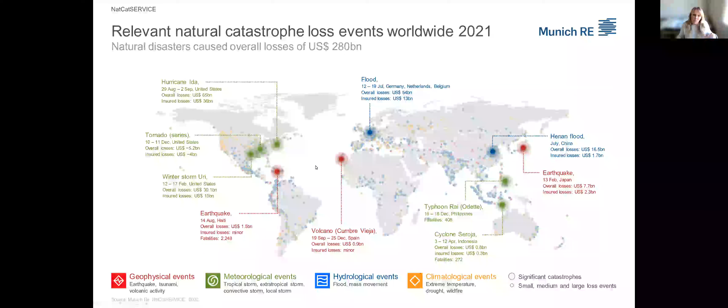So when we look at those top 7 costliest natural disasters worldwide in 2021, we see that this European flooding really ranked second out of everything else in the world. First was Hurricane Ida, with $65 billion of total damage and losses. The flooding in Europe, the sum of all 3 countries combined, is about 54 billion of damage, 13 of which were insured damage. The US in total actually took away the highest disaster losses, with a cumulative sum of $145 billion.

Now when we look at purely European ground and look at the flood events in the last 30 plus years, we see that the 2021 flood was also really the heaviest in terms of the death tolls. 238 is more than 3 times whatever a flood event has cost in the last 3 decades.

And the same is reflected in the cost amount. We see here with the $54 billion that I just mentioned, the 2021 flood way surpassed any of the floods since the early 90s. Now the question may arise, why is this so expensive? Why was this so costly?

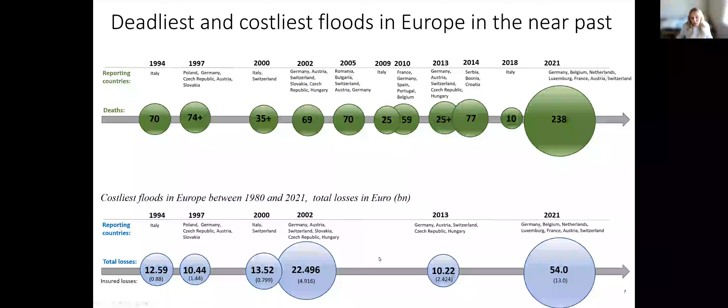Now, many people asked afterwards, why was this flood so devastating? Especially in areas like the Ahr Valley or other regions along the Erft and Ahr rivers, it was really a combination of very unfortunate but common circumstances: the local geological condition, a pre-flood soil saturation, and an extreme precipitation.

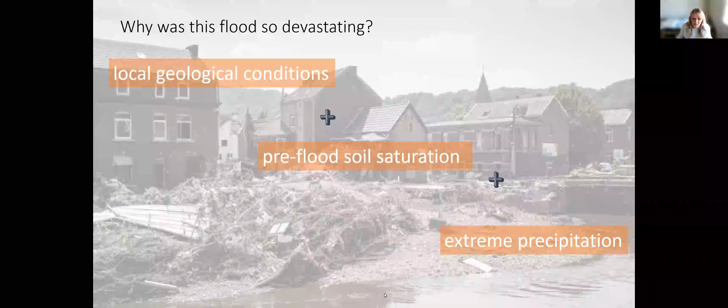So when we look, for instance, at the Erft River shown on the top photo - I hope you can see my mouse pointing out the river - as well as the River Ahr, both are located in valley areas. If we look at the elevation profile for these cross sections outlined on the left, we see that the rivers respectively lay at the lowest elevations and are surrounded by hills, mountains, occasionally with slopes of up to 55% inclination.

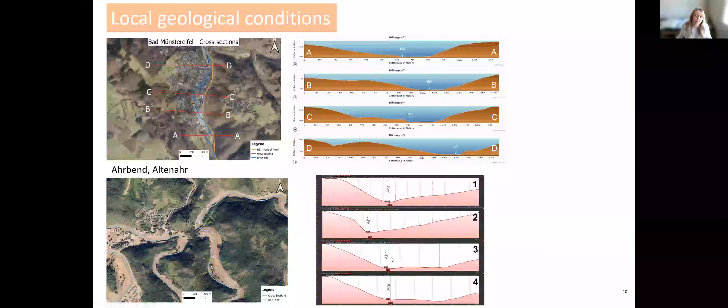So they don't only have the precipitation of the area, but also the runoff of all the surrounding area and whatever comes from upstream. So the accumulation of water and likewise damage that was caused in these valleys was enormous.

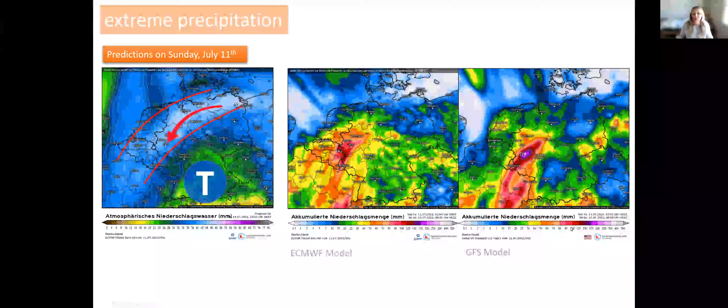Now, the warnings went out early. We knew that the low pressure system Bernd was coming in from the south of Europe into Central Europe, especially Germany. Initial predictions set a cumulative precipitation of about 100 to 150 millimeters occasionally, or very specifically up to 200. Now, as the days Sunday, Monday, Tuesday progressed, on Tuesday, this whole map took a little bit of a different shape. Now really the country was alarmed, huge amounts of precipitation expected.

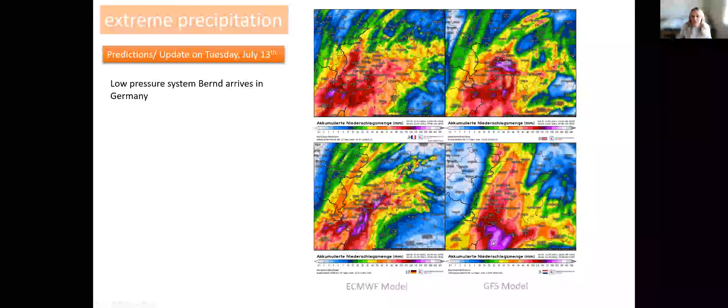This number was actually exceeded in some regions - it went up to 240 or 248, even in Belgium.

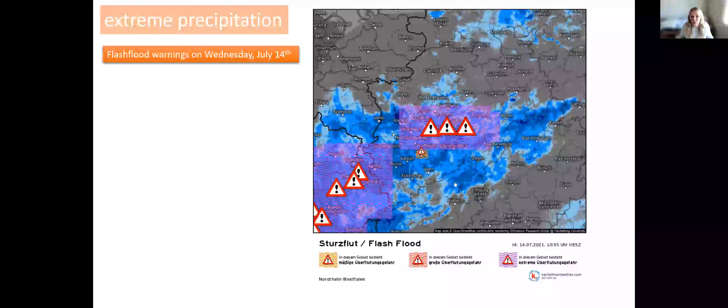And now on Wednesday morning, really the first flash flood warning was issued. You can see the blue area expand in size and width, and flash flood warnings for a majority of the regions in Germany, Luxembourg, and Belgium was issued. Still, not all people evacuated.

Many people thought it was going to be a similar situation to the 2016 flood event, but on Thursday morning, this little river here, the Ahr River in Altenahr, took a totally different turn and turned into a massive river stream, flooding all the plains around it. The flow velocities were relatively high, much higher than experienced before, and I believe Dr. George is going to comment on that later in this region.

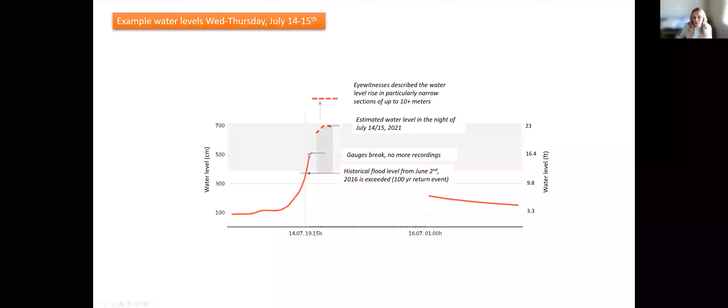As a result, most flood gauges actually lost their capability to read. It started a little below 100 centimeters, 1 meter, and the 3.45 meter mark from 2016 was quickly exceeded. The gauges broke at about 5 meters, and the final water level height was estimated to be around 7 or 8 meters, in some regions up to 10.

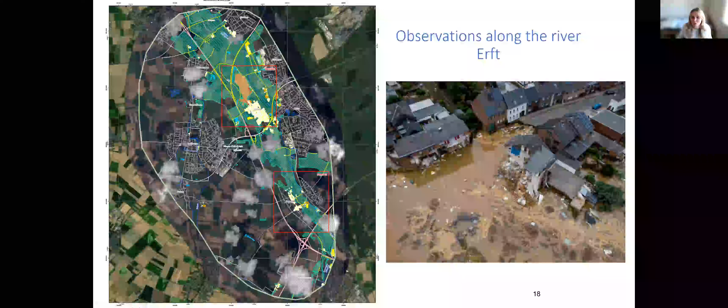Now this left failure right here was heavily featured in the news, and you might have seen this. What still appears as just a limited amount of damage in this photo, with damage to residential structures and this road being completely flooded away, looked substantially different from an aerial perspective. You see here this gravel mine in the very back.

As a result of this gravel mine, the strong hydraulic conductivity of the gravelly soils here, and the soft surface soils in the nearby agricultural fields, the water had an easy way in to fill that gravel mine as a very low-lying area. It formed these massive canyons that you see on the left-hand side of the photo. At this time, these buildings were still standing, shortly after partially ripped away, and they were not there anymore when we were there.

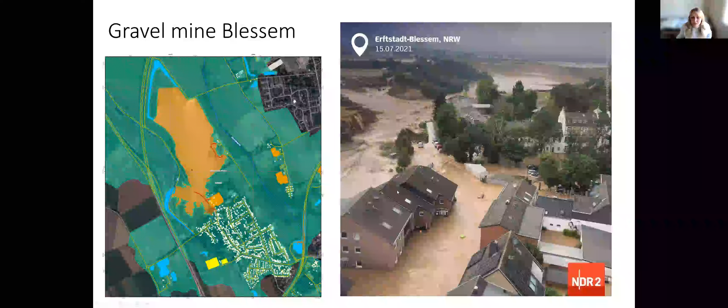Here we see a before-after photo, and it really looks like another version of the Grand Canyon. Those cuts were up to 10 meters deep. So nearby, we had this building you can use as a reference for both pictures.

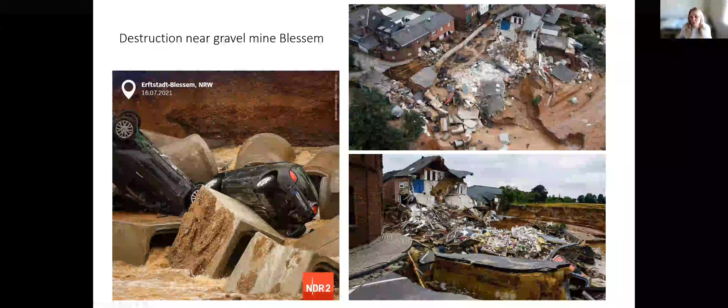As a result, residential structures and infrastructure were damaged heavily. We can see on the left side, and also here on the top photo, the damaged pipelines. A freshwater supply line made of concrete segments was completely damaged, along with a massive amount of residential structures. Everything, all the debris, was washed away with it.

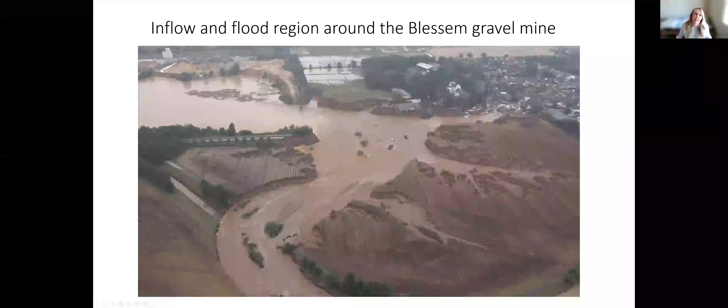This aerial perspective again nicely shows these craters that formed over a vast extent of this floodplain. When we arrived on site, it took a slightly different shape. The water had receded, and work was underway to clean up the site.

You can still see here some minor slope instability along the river, along the gravel mine, and we were able to access the gravel mine with police support, even though it was restricted at the time.

In total, 130 kilometers of roads were closed and damaged right after. 50 kilometers were still closed and not usable two months later, and the initial repair cost estimate of 100 million was by far exceeded.

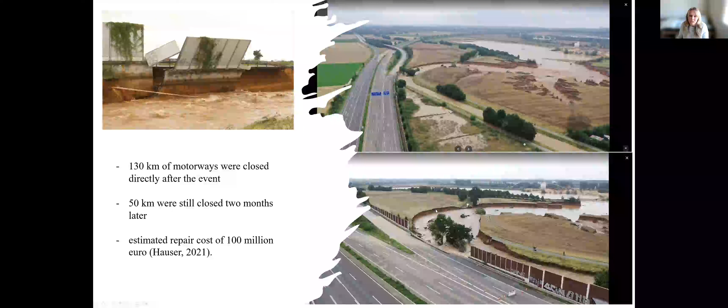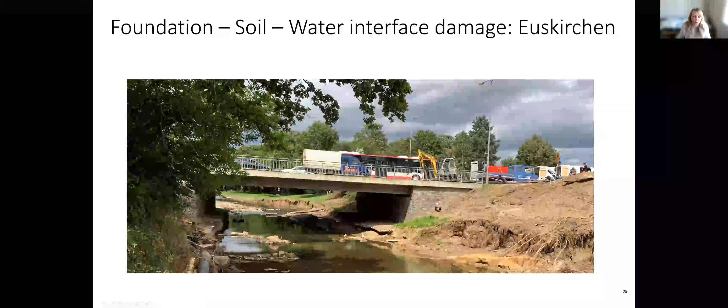Along this river Erft, we had some other observations worth mentioning because they were common and repetitive as a failure pattern. We very frequently saw erosion and washout of the area between soil, foundation, and water interface. Even though this armoring was supposed to be more engineered and stabilized with stones and cement, we often saw it washed out, in severe cases causing substantial damage to the bridge foundation itself. You see this here, with washout magnitudes of close to up to 1 meter.

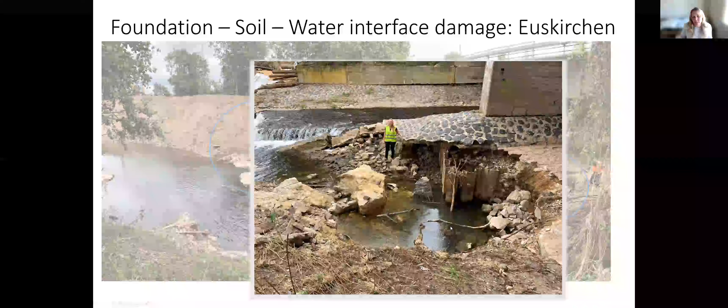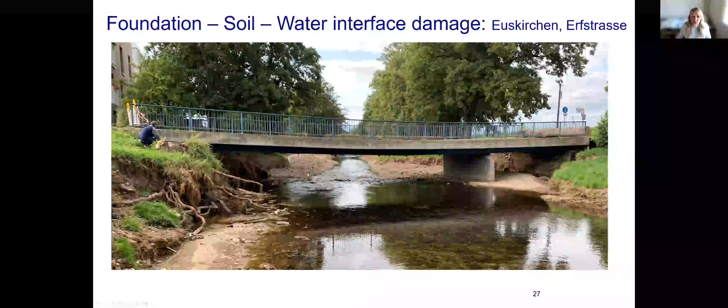Another example along the Erft River is this bridge, which we also looked at. A very common failure pattern is washout of the abutment right here. Even though this abutment is still standing, you already see the bridge deflecting heavily. Something on the right-hand side looks a little odd, and after checking Google before-imagery, we noticed that this abutment, while it was standing, was taken out by the floodwaters. As a result, the pier wall on the left-hand side shifted off its original location by at least 40 centimeters and experienced substantial tilt.

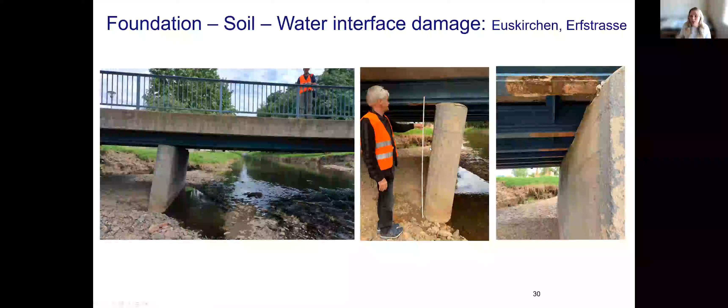The Erft River also expanded substantially in width in areas outside the residential regions of the city. This is approximately 3 to 4 times wider than it used to be. You see these deep cuts here, and infrastructure lines were heavily damaged. Worth mentioning, the minimum embedment depth for utilities in Germany is approximately 60 centimeters, for areas that don't experience frost, going lower in colder regions. But we noticed this might not even be enough, and this is something that could be reconsidered for future utility design and relocations, moving away from riverbeds or channels and considering a much lower embedment depth.

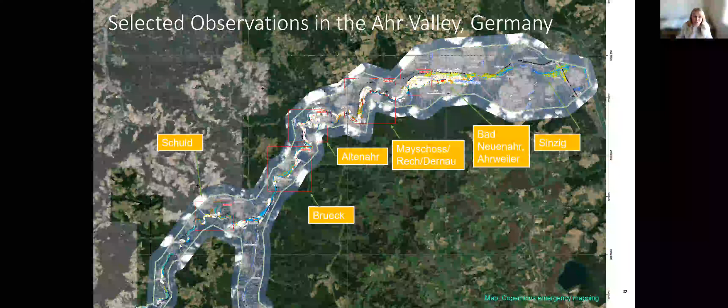From here, I want to stop with the Erft River and give a 5-minute damage overview of what we saw in the Ahr Valley itself. This was the heaviest region with damage. We visited almost every single little town and stopped at every location where there was something notable, but this was really the one that was most shocking, and you might have seen this in the news as well.

Over 200 hectares were affected, approximately 500 acres. Out of the 56,000 people in the Ahr Valley, 17,000 could not return to their residences. Out of the 4,200 residences or buildings, 467 were destroyed and 3,000 were damaged to the point where you could not return. Some only lost the facade, some lost the complete house with only the basement standing. That accumulates to 70% of the 4,200 buildings having to be removed.

Out of the 112 bridges, 62 were completely destroyed and could not be used, 13 were severely damaged and had to be demolished afterwards, and 35 were operable after some repairs. Some of those you're going to see in the next slides.

This is the entrance to the Ahr Valley as we came in when we were driving in. Even though the Ahr Valley was closed to the public due to heavy disaster tourism, we did get the necessary permits to do our research studies there.

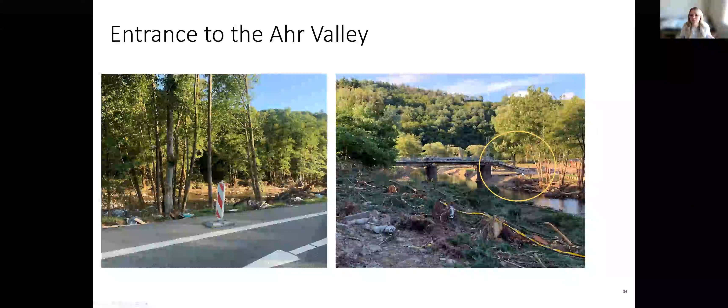This is really not a lot of damage that you see here. Minor, the abutment region failed and the bridge deck collapsed down. Compared to what we saw later, not a big deal.

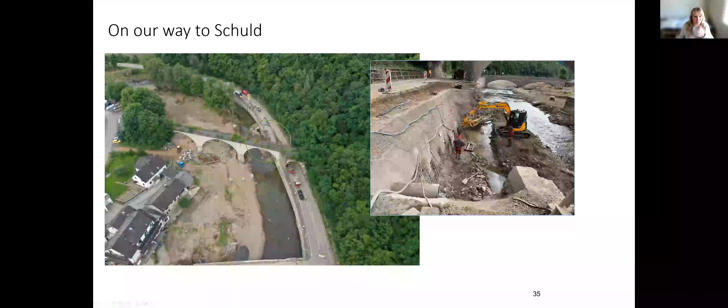Coming into Schuld, the damage was much, much more severe. You can see the river widening substantially, causing damage to residential homes all around it, a lot of debris that flew down, and also a lot of damage to the utilities. Here you see a temporary stabilization of electricity boxes that were exposed, but the town of Schuld did not have electricity, gas, or fresh water for several weeks after the flood.

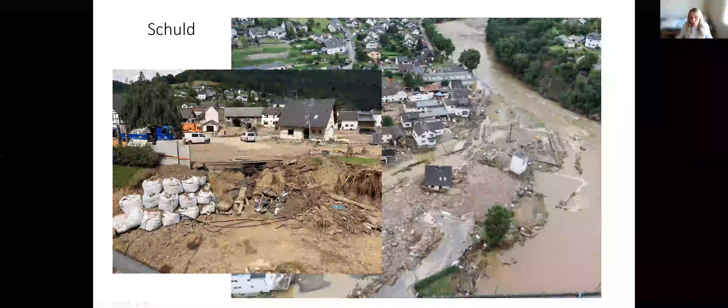Here you see a bridge in Schuld that is very representative of damage we have also seen further downstream. Even where some parts of the bridges survived, the top deck was often washed off, and a lot of damage was caused either by debris or by tree logs carried by the floodwaters.

One thing that all of us observed and really wanted to point out is the impact that debris and tree log loading had on the bridge, not just in terms of structural impact, but also in terms of clogging the cross-sectional flow area underneath the bridge, creating a dam, holding the water back, and then the water would rise, and either the bridge would fail or it would overtop at a certain point.

Eyewitness reports said they experienced tsunami-like flood waves coming downstream as a mix of water, debris, and trees. This bridge was later somewhat reestablished as a pedestrian bridge and reused. You can also see how the water masses eroded and washed off all the armoring surface soil and vegetation around, and water levels rose here up to probably the top of the first story of those houses.

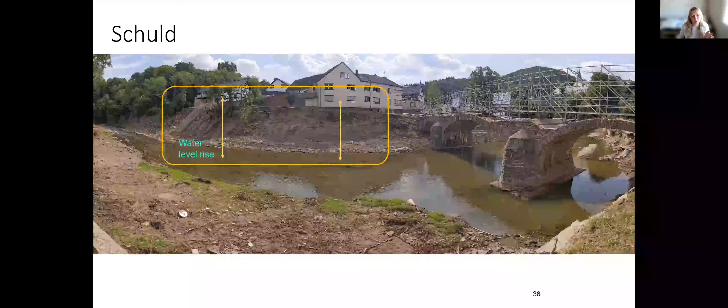The town of Altenahr itself was also heavily damaged, and one of these bridges was also one of the railroad tracks that used to continue here. Almost the entire set of railroad tracks or railroad infrastructure in the Ahr Valley was gone. About 600 kilometers of tracks total destroyed in Germany, more than 1.3 billion euros in damage.

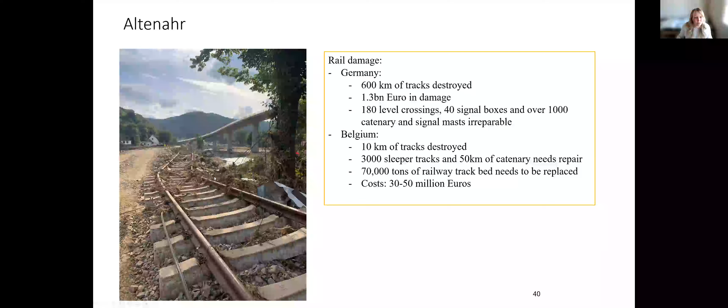Much less railroad damage was experienced in Belgium, but we saw this over and over again. When we came to bridges that were damaged, the rail tracks were still hanging, as here in Mayschoss. Here we see the same thing in Walporzheim. Here we see it towards Bad Neuenahr-Ahrweiler.

The Ahr Valley train looks so romantic when everything is intact, and this is the situation afterwards. This photo also gives us a good idea of these very common abutment failures and the washout of the abutment fill and the connection between the bridge end and the continuing natural ground or the roads. This was often observed by us as a very weak point that requires improvement in future construction.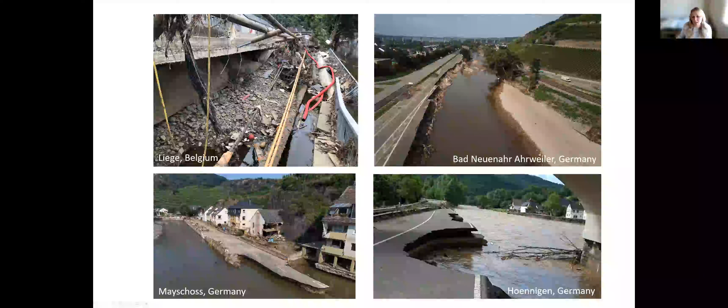One in Belgium, this is in Bad Neuenahr-Ahrweiler. This is still not repaired today. Here in Mayschoss, the erosion of the road, and this town was completely separated from everyone else, and in Hönningen.

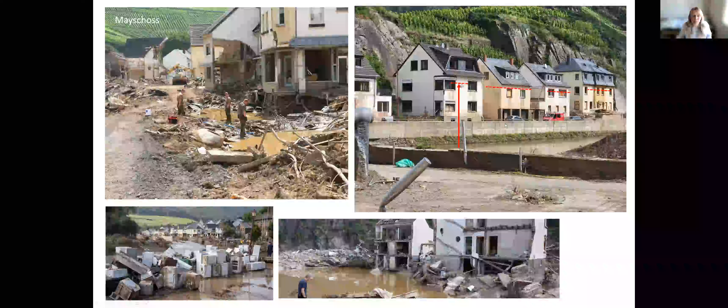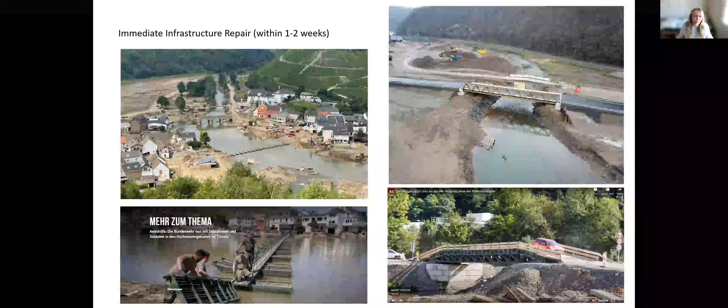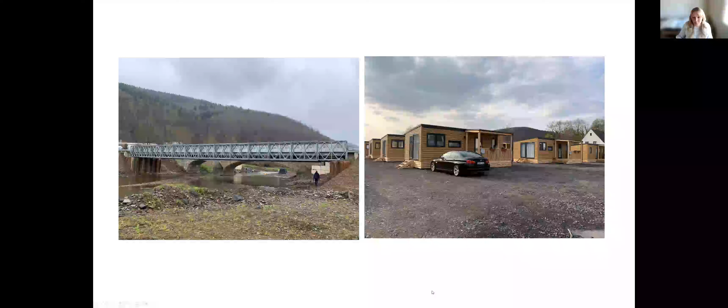So from here on, I will give it to Dr. Michael George, and he is going to present two case studies, the first one being on the famous Steinbachtalsperre.

Thank you, Professor Lemnitzer. Appreciate that. So I'm going to talk about two specific sites we visited.

The Steinbach Dam here in Germany was one of those. Most dams performed pretty well, with this case being the exception to experience some damage. This is a rock-filled type dam, built about 23 meters high in the 1930s and later updated in the 1990s. It has a pretty small reservoir, but has an asphalt upstream face and an asphalt roadway on top, which played a big role here.

During the event, this dam overtopped for about 3 hours, which resulted in some pretty severe erosion and gullying on the downstream side, creating concerns for potential failure. Typically rock-filled dams don't do well in overtopping events, often failing within 15 minutes to a couple hours. This dam held on, and a lot of that was due to the roadway.

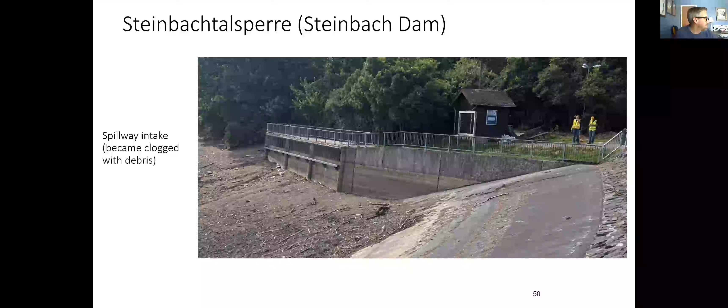It wasn't a bulletproof design. You could see in the last slide pieces of that roadway falling in. So would it have held forever? Probably not, but it was enough in this case to hold off.

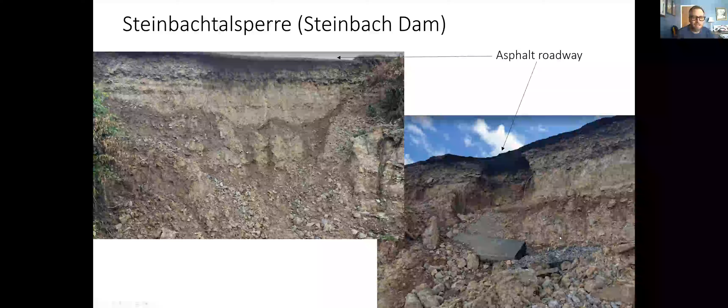Here you can see just a little bit of the materials. It was a pretty clay type rockfill material. We didn't really see much zoning even with the cut within the dam, which we'll see in a bit. But you can notice in the gullies that formed downstream these steps, which is characteristic of a scour progression in more cohesive materials.

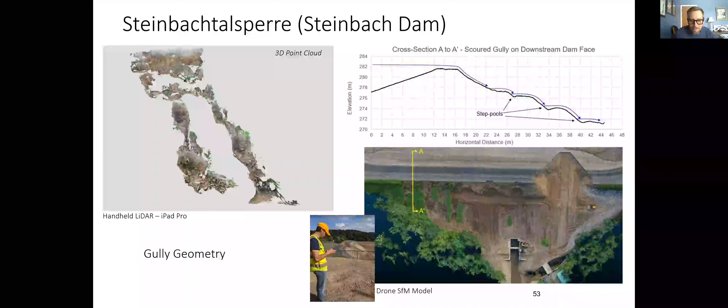Another component that contributed to the dam surviving was that the crest was relatively flat. You can see the excavation they cut in after to drain the reservoir, but the flatness of the crest prevented any major flow concentrations, so the rills and gullies that formed were relatively evenly distributed along the face, rather than one big location where flow was concentrated, which helped it as well.

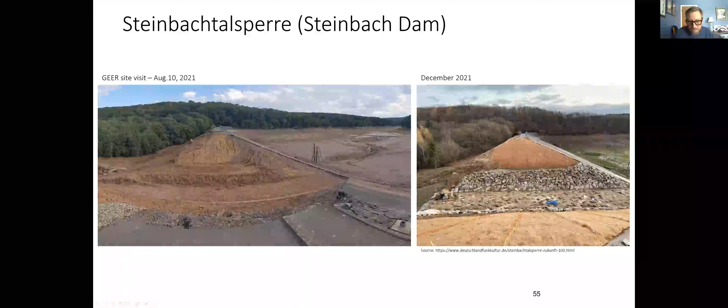The next site I want to talk about is Altenahr, and specifically the Altenahr tunnel. Anne mentioned this briefly, but it's a closed-in valley with very high water levels, and this was one of the areas that received a lot of damage.

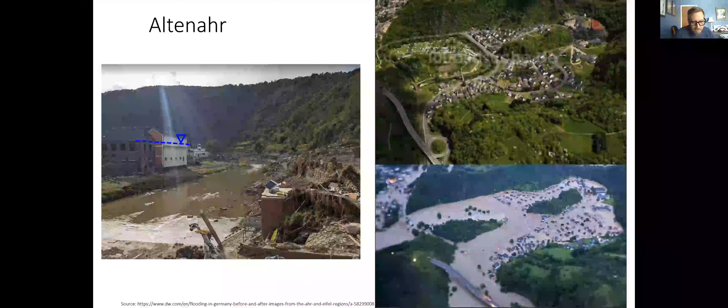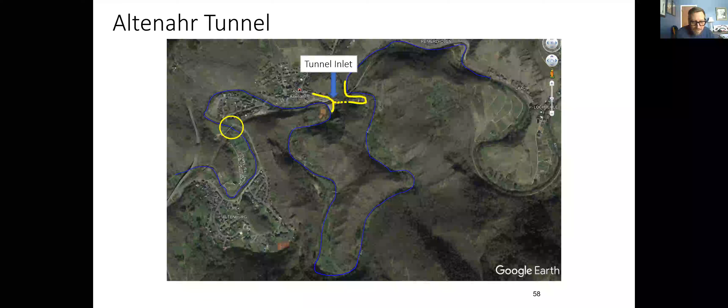You can see the inlet to the tunnel further down the valley there with the blue arrow. Here's where that inlet is, you can see the blue path of the river makes a big meander around it, and the tunnel connects two of those locations on the river. The yellow circle there corresponds to the picture from the previous slide.

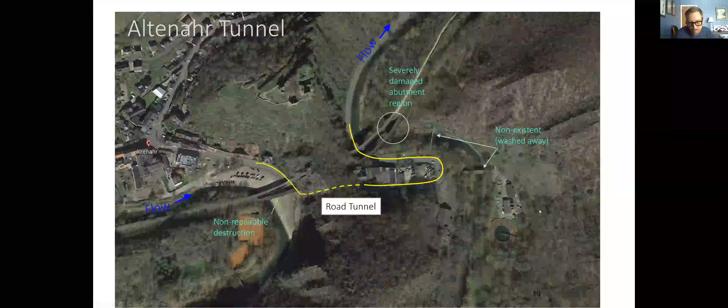Here's a close-up view from Google Earth. You can see two bridges coming in, and on the other side, two bridges going out. You can see a group of homes and buildings right directly downstream at the outlet of the tunnel, and there's a wastewater treatment plant on the lower right. Basically all that infrastructure was damaged, destroyed, or washed away.

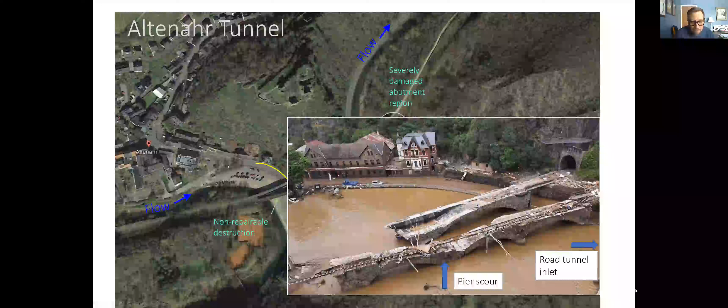Here's after the events. You can see the damage to the two railroad bridges. The pier on one bridge in the foreground is sunken down from scour. Also note the building in the upper left corner - you can see the water line in that, which will be shown in the next picture.

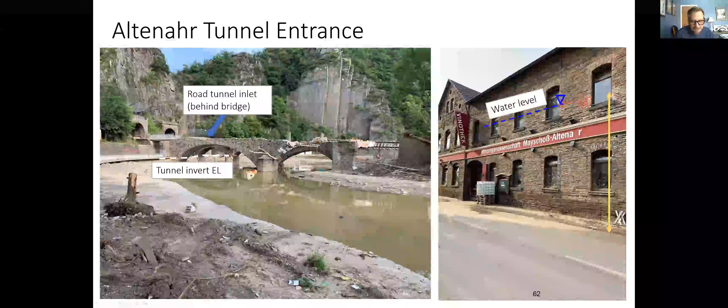Here's the entrance to that tunnel. You can see some debris marks along the lining of the tunnel. We also saw some plucking of the concrete blocks in the pedestrian path through the tunnel - those were covering some of the utilities that went through the tunnel. I think because they had gaps underneath, that allowed pressures to get underneath those slabs and essentially pluck them out and mobilize them downstream.

The flow in the event went through the tunnel, and that wasn't actually the first occurrence for this particular case. Prior to the 2021 events, this tunnel flowed through in 2016 with a depth of about 30 centimeters. But the depth in 2021 was a lot higher, or at least what we thought was the water depth, about 3.4 to 3.8 meters. The discharge associated with this event was estimated to be similar to the 1910 event, where the water level in the tunnel was about the height of my head. It really wasn't clear what the discrepancy in the potential water levels was, but based on what we saw, this appeared to be much higher in this event.

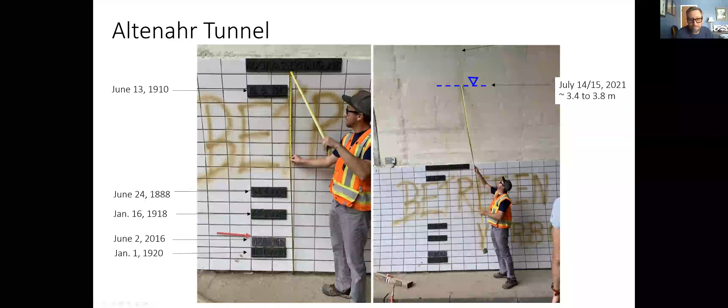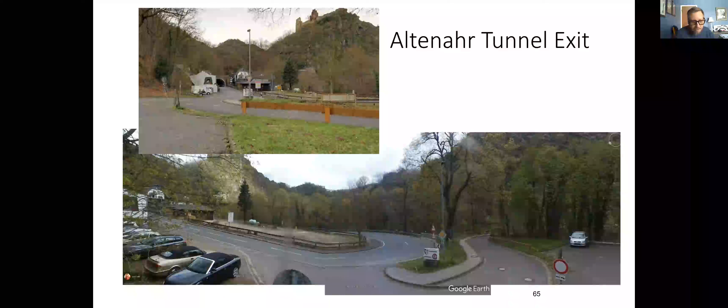Here's a couple of pictures from the 2016 event. On the left is the inlet to the tunnel, and on the right is the two railway bridges.

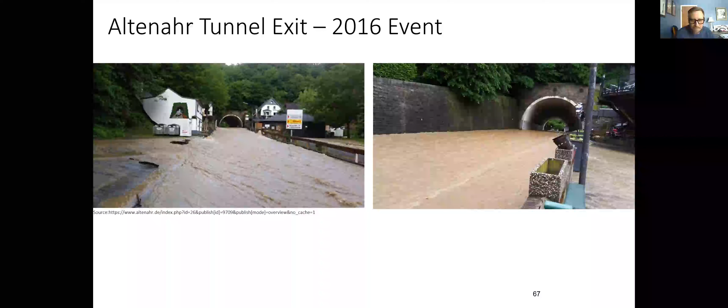Here's the outlets. You can see water essentially just cascading down the roadway there, and it wasn't a significant amount of damage in 2016.

The 2021 event was quite a different story. You can see the massive scour that occurred right at this outlet, the exposed bedrock, and the steeply dipping bedding planes or foliation, and all the undermining of the houses on the right. It's not surprising if you consider a 3 to 4 meter thick hydraulic jet coming out of the tunnel and impinging down on the material below, that we get such significant erosion.

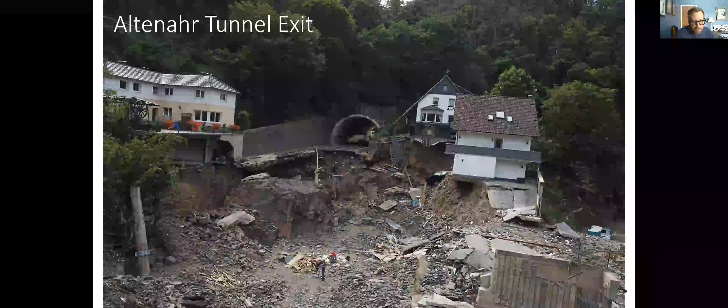Here's a quick slide on the bedrock I mentioned. Those outcrops held up pretty well - we did notice some plucking of some blocks. There looked to be more favorable jointing orientations, which helped resist some of the erosion. It did look like there was a shear zone or weaker zone running down the middle between those two bedrock outcrops, where we saw more scour and, coincidentally, undermining of the white retaining wall on the side. But basically those hardened areas of bedrock forced flow to the right of the photo towards these more alluvial type soils, which eroded quite readily, hence all the undermining on that side.

Here's another view just downstream. You can see the two bridges for the railways coming out there. On the right abutment, they had quite severe scour. The wastewater treatment plant at the top of the screen was essentially destroyed during the event.

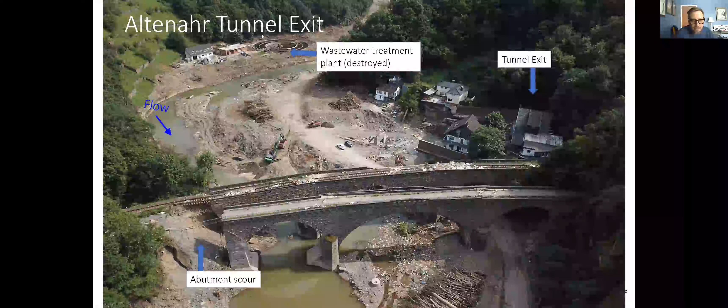This is a case where we used both drone and ground-based LIDAR. We only really had about 30 minutes to get into this site, so having those two methods to collect data was quite helpful. I took about 5 manual strike and dip measurements on the outcrop, but with the LIDAR data we can go back and take hundreds in the office. That was a real advantage having that equipment with us.

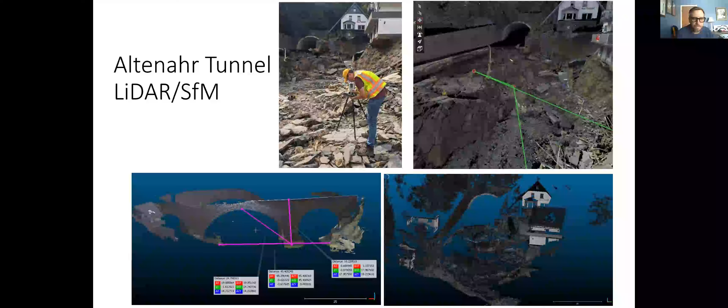And I think that might be my last one, so I'll hand it over to Professor Gardner.

Thank you very much, Mike. I'll be talking a bit more about some of the instrumentation we use for phase 1, and then going into more detail about some of the multi-spectral stuff.

The first equipment type we use is LIDAR, light detection and ranging, which uses a pulsing laser to measure ranges. The first sensor we used is a Leica RTC 360 scanner, with a range of about 60 meters. That unit, along with a tripod, batteries, and iPad, all fit inside a backpack. It's relatively lightweight, so really good for rapid post-disaster reconnaissance, and it does relatively quick scans.

You can see an example of a structure that we scanned there - this is a bridge in Trooz, Belgium. Clearly there's some settlement and tilting in the piers. If you look at the bottom image on the right, you'll see this is the resulting 3-dimensional model that you get out of the LIDAR.

You can make really accurate measurements in the LIDAR. So assuming that bridge pier was initially vertical, you can look at the amount of tilt, and then looking at the pre-flood bridge deck elevation, you can get a sense of how much the center of the bridge settled, likely due to scour of the foundation underlying that pier.

Secondly, we used an iPad Pro with the onboard laser scanner. This was a relatively new thing that just came out with the recent iPads, and you can see an example on the bottom left, kind of like what Mike had talked about earlier with his example from Steinbach. This was an outlet from the city walls in Bad Münstereifel.

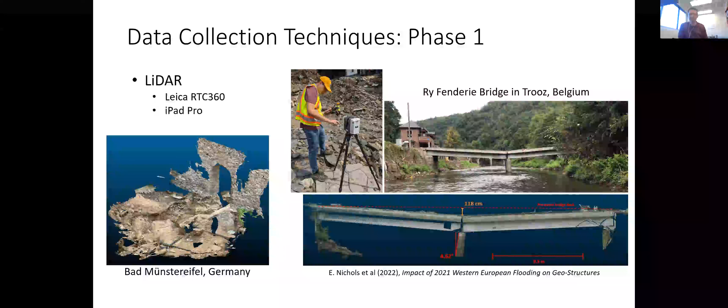So again, this is a small piece of equipment. You can throw it in a backpack. You have high mobility with it.

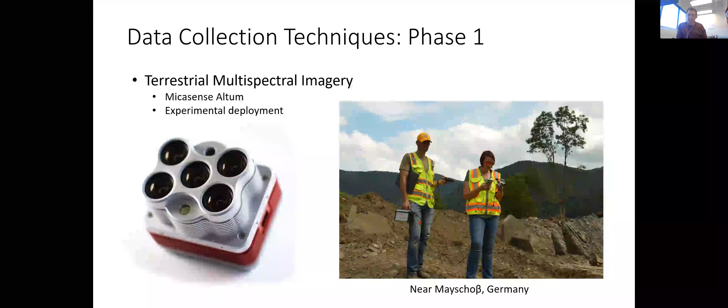But this is really an experimental deployment. The use of multispectral imagery in this type of post-disaster reconnaissance hadn't really happened before, or at least to our knowledge hasn't really been done.

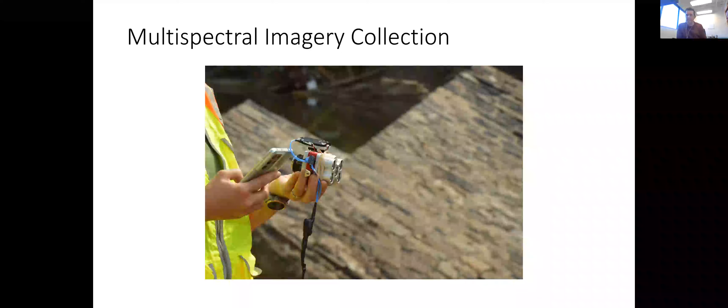So looking a bit closer at this image here, you can see the camera being held. Normally, these types of units are mounted on a drone. They're used a lot in agricultural deployments for monitoring crop health and that kind of thing. But in this case, since we were just carrying it, we had to power it externally, and that's what that blue wire there represents, is we're just powering from that external battery pack. Additionally, normally the camera is triggered by the drone by connecting to its Wi-Fi. In this case, we connected to that with a cell phone and then just triggered pictures or collected images by pinging the Wi-Fi.

Next slide. So interpreting multispectral imagery, what we're looking at here, I'll walk you through this case study for Bergischerhof near Mayschoß. The image on the left is just a standard RGB type image. Both the RGB images and the multi-spec images were taken about 3 to 4 weeks after flooding. The visually identified high water mark when we were out there is in that structure on the left, just below the second story there.

If you then look at the images on the right-hand side, those are the 6 different images collected simultaneously by the multispectral camera with these different color bands, and what they show is the reflectance in each of these bands. The top left one is sampling the blue band, top right is the green band, middle left is red, middle right is near infrared, and bottom left is red edge. That lower resolution image on the bottom right is the thermal imagery. So we're looking at reflectance in these different bands.

And so you can see that the high water mark, based on what we observed in the field, also manifests with different levels of strength in the multispectral imagery. So we wanted to look a bit more if there's a way to isolate the signal to potentially use this in future applications.

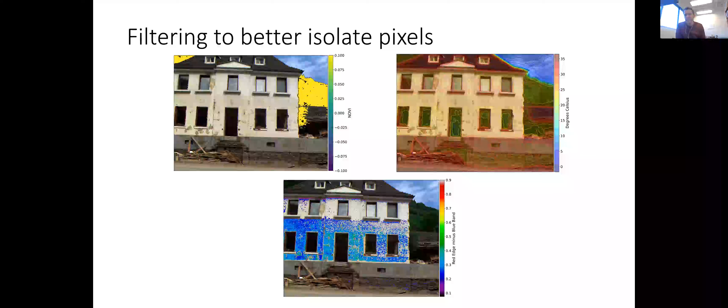Second, the top right image is a thermal overlay on the building facade. You can see the temperature generally is higher on portions of the building above the high water mark versus below, and the temperature in the concrete is substantially higher. So we also filtered based on temperature, removing any pixels with a value greater than 27 degrees. The result is shown in the bottom image, where we've isolated pixels associated with the high water mark.

What we tried to do additionally is see if we could isolate this signal to a single mode by coming up with different combinations. We kept the pixel-by-pixel difference between the red edge and blue reflectance, but normalized by the sum of those two bands. Then those different modes get collapsed into a single mode that isolates pixels only associated with being below the high water mark.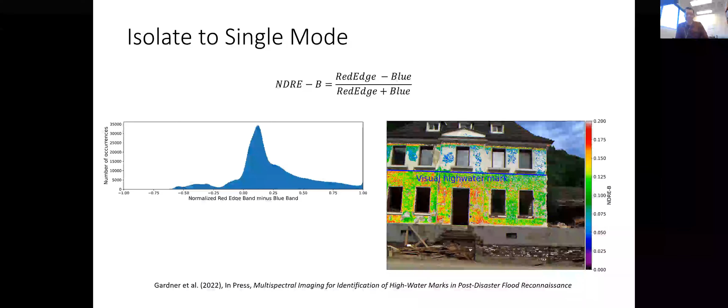This should transition well to what Nina's going to talk about in terms of using different measurement techniques to try to get a more comprehensive idea of how things unfolded.

Thanks, Mike. So you've seen we collected a lot of data and observations in phase 1. So why come back for a phase 2? Even though we were able to collect so much data, there were clearly access limitations in August 2021, some due to water levels and flow velocities. In the images you saw that the waters had already significantly receded, but there were still a lot of unknowns. Water access was impossible in a lot of places, and there was a lot of ongoing rescue and first responder efforts still going on, which did not allow more in-depth data collection, particularly in the water.

You saw examples where scour was mentioned, particularly piles that even with the water receded were still sitting in the water. From the changes to the structure, we can make a pretty good assessment that probably scour is responsible for it. But if you really want to understand the role of the water-soil-infrastructure interaction, and possibly debris interaction, it would be great to have a better idea of how deep the scour hole is, how big it is, what the erosion patterns are around the infrastructure, what possible deposition patterns there are, where the sediment is ending up, and what the geotech properties actually are in the water and how that relates to these erosion and deposition patterns.

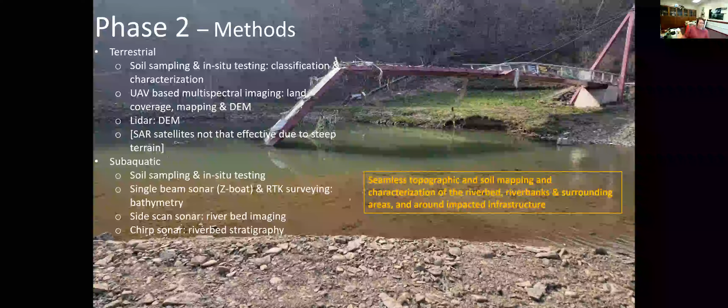Next slide, please. During phase 2, which I think was already mentioned, this occurred in March-April 2022. We had 7 US-based GEER team members on board, and again collaborators from Germany who helped facilitate this work significantly, especially considering all the equipment we had to ship and prepare.

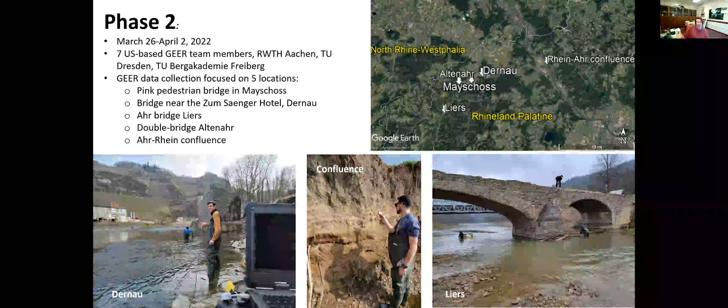These 5 sites featured the aspects that they're at least near or on the water, that not much repair work had been done around the areas and structures we were most interested in, and that we had good access there for equipment. So after considering about 10 to 12 sites, we narrowed it down to these 5. Okay, next slide, please.

These little inflatable hard bottom dinghies are actually quite helpful in an environment like this. You can just lift them into the water, they're quite resilient when it comes to scratching, and they allow you to navigate in these fairly calm waters quite well.

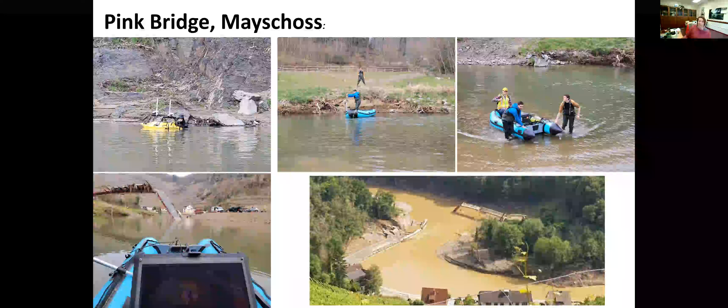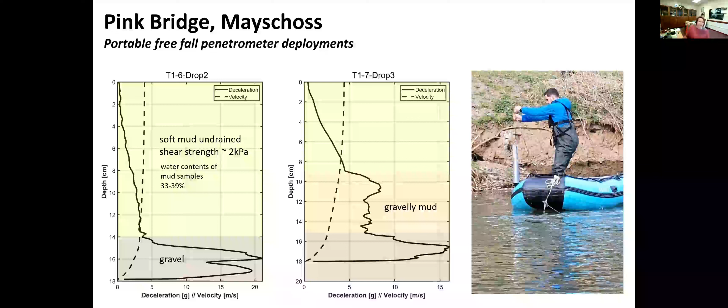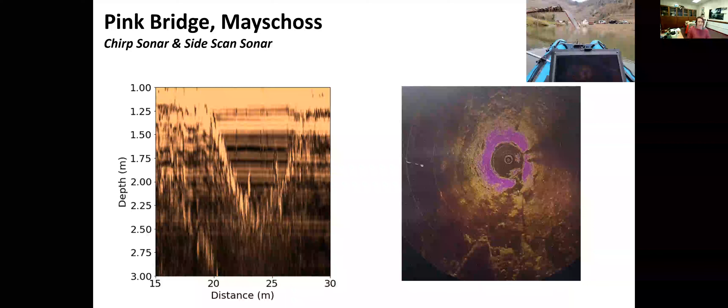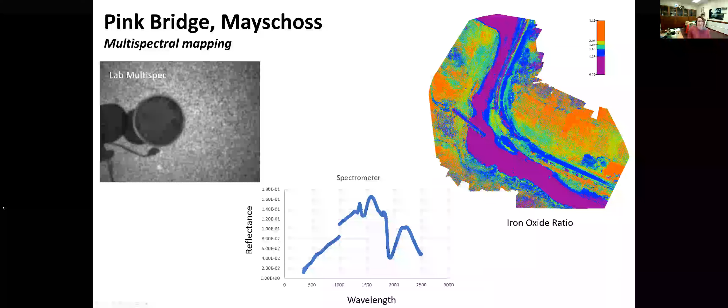So just in summary for phase 2, we collected 5 unique terrestrial to subaquatic data sets that included bathymetric and topographic change in this location, sediment relocation, soil properties and conditions, and really giving an idea of flow sediment structure interaction.

I would also like to point out that we tested combinations of methods for post-flood reconnaissance that have not really been used in this way and in this combination in a setting like the one we are addressing here, including remotely operated surface vehicles with unmanned aerial vehicles, low and high frequency acoustics in a shallow water body. That's really more recent technology that allows us to work with these instruments.

And then subaquatic acoustics and multispectral aerial mapping that is combined with in situ testing for mapping the soil type and properties. That's all I have, and I hand it back to Anna here.

Thank you very much. We just want to use the last 2 minutes to summarize some of the selected key takeaways that stood out to all of us as team members, based on phase 1 and phase 2 observations.

One was the debris mobilization, either natural debris or man-made debris. It really played a significant role in failure of many bridges and other infrastructure elements. It's often not accounted for in the hydraulic design and also not in structural design codes.

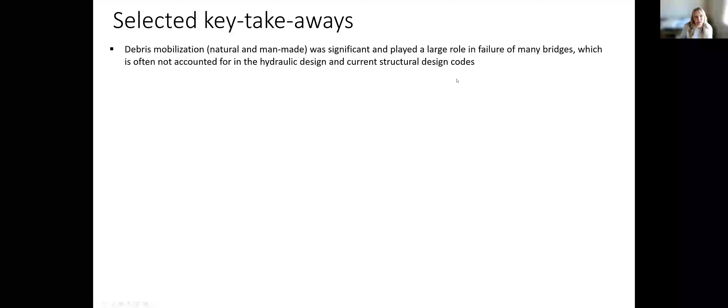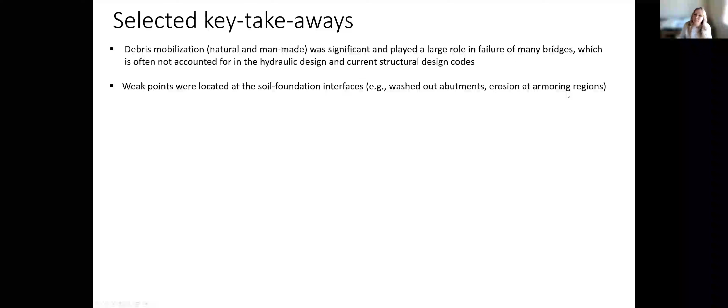The weak points were often located at the soil foundation interface, either observed as washed out abutments or erosion of the armoring regions, particularly at bridge infrastructures.

The utility infrastructure, as I mentioned, was in almost all cases exposed. We didn't even show you photos of Bad Münstereifel, where entire roads and streets were washed out, and everything was pretty much laid open. A deeper embedment could be considered, and a better structural connection or embedment would be beneficial in the future.

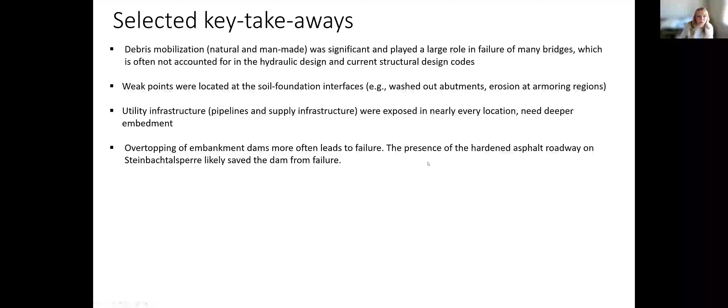Overtopping of the embankment dams more often leads to failure. In our case of the Steinbachtalsperre, the presence of the hardened asphalt roadway really saved the dam from failure, as Mike pointed out.

We also all agreed that the combination of the emerging remote sensing and geoacoustic techniques that we were able to use, combined with geotechnical testing, really enabled unique insights into flood soil infrastructure interaction. We were able to collect a very large amount of data quickly, and we'll show you where to access them publicly.

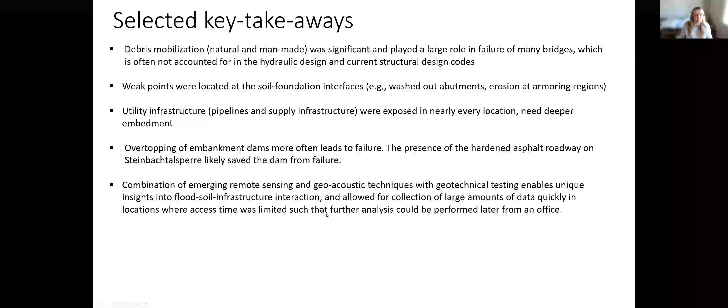Especially this was useful in locations where we didn't have enough time, where we were given only 20-30 minutes, or where we couldn't even go and had to fly in later.

The handheld LIDAR was very useful as a small portable tool for documenting conditions quickly and accurately in 3D. This is something that we thought would be very beneficial for any group that deploys to take advantage of that technology that's now commercially available.

And I want to point out again what Nina already mentioned. Within our phase 2 and also phase 1, we really assembled comprehensive post-flood data sets, more in-depth measurements at 5 distinct locations that now enable us to do a lot of follow-up analysis on flood soil structure interaction.

With that, I would like to show you where you can get access to these publications. Our GEER report, as Elliot mentioned, is pretty hefty. It includes 260 pages and covers much more area than what we presented in this webinar.

We have soon a report coming out that summarizes the phase 2 deployment from March 2022. The first data set is already publicly available, including all data measurements, including LIDAR, SFM, and regular photography from phase 1. You can access that through Design Safe. We will also publish everything from phase 2 and make the DOI available very shortly.

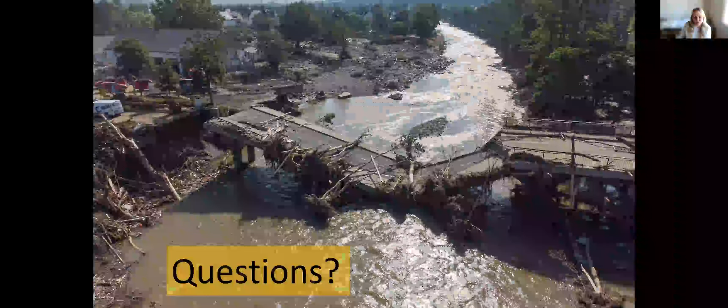With this, we are at the end of our webinar. I'd like to thank my team again for preparing the slides, for going on those trips, and for doing great research and having a lot of fun together. And I would like to thank the audience for sticking this out with us, and we will stay around here to answer some remaining questions.